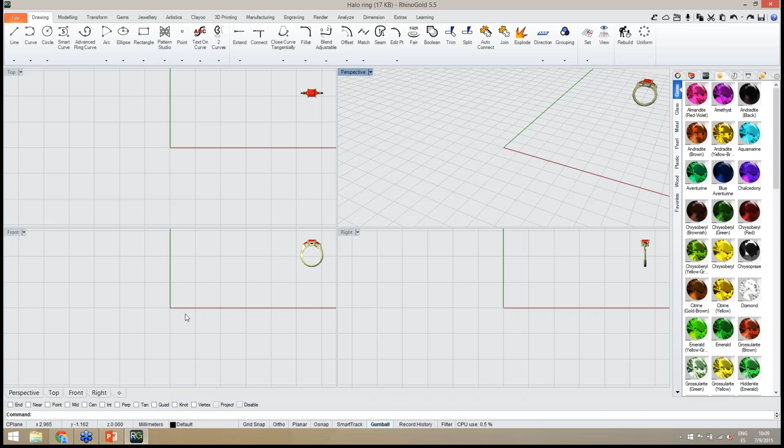So let's start with RhinoGold. I'm going to open the RhinoGold interface and let's start creating this model. As always, when we are creating a ring, the first step is always to define the ring size. In this case, under the jewelry tab with the gauge tool, we can do it easily. We just need to define in the side panel the ring size we want to use.

Also, we have several ring size charts, and after defining the ring size, we have a circle with the ring size we want to use. After this... May I? Yes, of course.

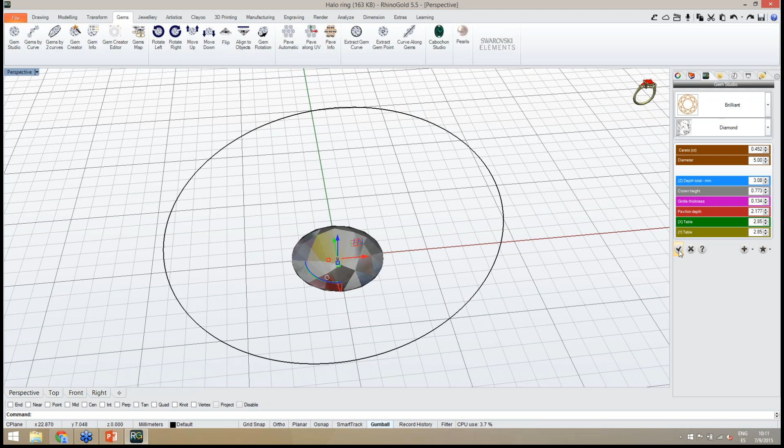So now I'm going to define another curve to define the bottom part of the ring, but actually it's probably better to define the main gem first. So the next step, I'm going to define a gem with the Gem Studio, and here let's use 5 millimeters diameter for this gem, and I will place the gem on the top of the ring.

Raymond, okay, if you want. Feel free to interrupt me, because I can move on with the process while you are translating. So any moment, feel free to interrupt.

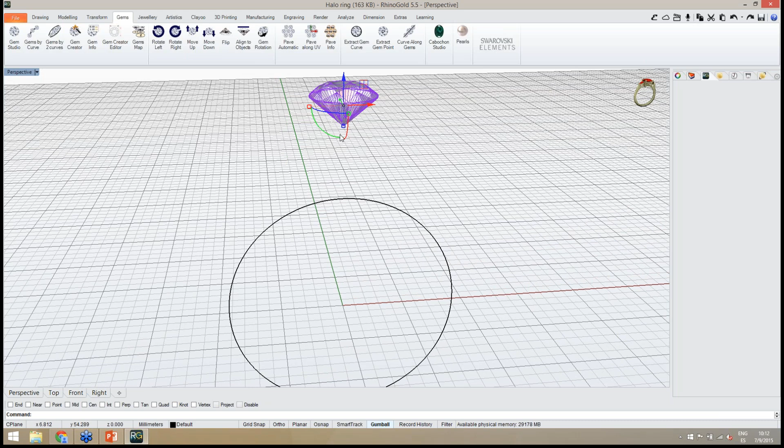Okay, so after the main gem, I define the position in the top of the ring. Of course, if I need to adjust the position later, I can do it easily, so there isn't any problem if it's not exactly the place we want to use the gem. And now I'm going to define the halo around the main gem.

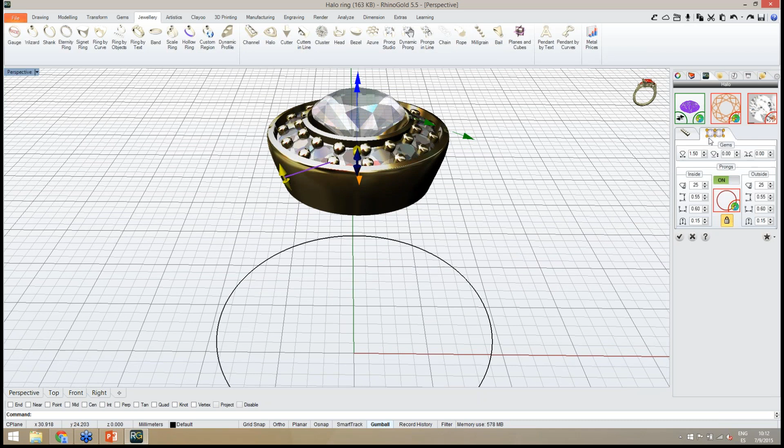So I just select the gem, and under the jewelry tab we have the halo tool ready to be customized. So now the idea is to use all the parameters from the halo tool in this side panel to define the halo. For instance, the profile. We can of course adjust the measure for the gems. In this case I'm going to use gems with 1.5 millimeters. Okay, and of course the same for the prongs.

We can adjust the position. As you can see in the side panel, easily we can adjust the diameter, all the measures, the position. So this is the idea.

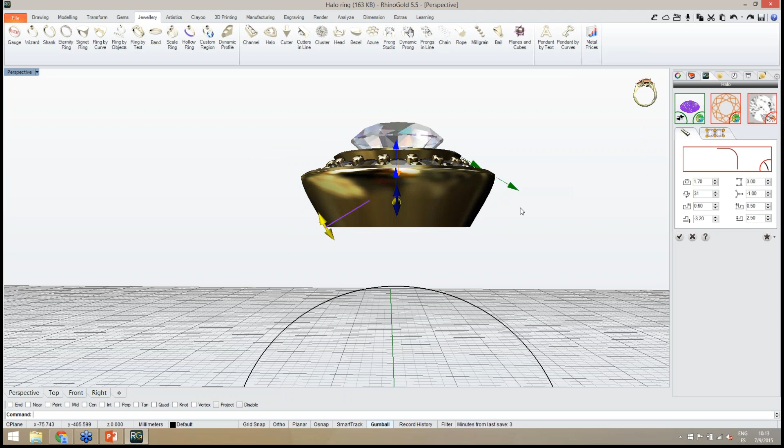So now I'm going to move on after the halo. Maybe I will just need to define less distance in the extrusion, maybe something like this, but we can easily define any position, and all the parameters are available in this side panel. So remember also we can at any moment edit the object and change anything we need.

So after the halo, I will then create the prongs for the main gem, but now I'm going to the front view to define all the other parameters for the ring. So now I'm going to define the curves in order to define the shank. To do it, yes, go ahead.

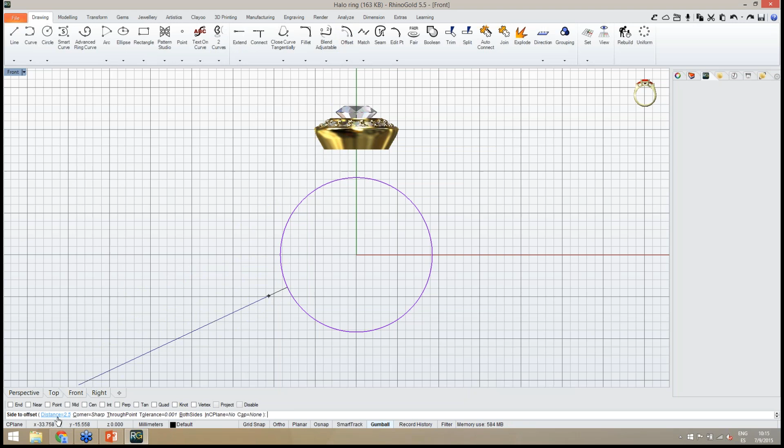Okay, so now the next step, I'm using the offset tool under the drawing tab to define, in this case, another curve in the outside direction with 2.5 millimeters distance. So we can easily define the distance to offset in the command line, and we just need now to click in the outside direction. So as you can see now, the result is another curve with 2.5 millimeters distance from the original one.

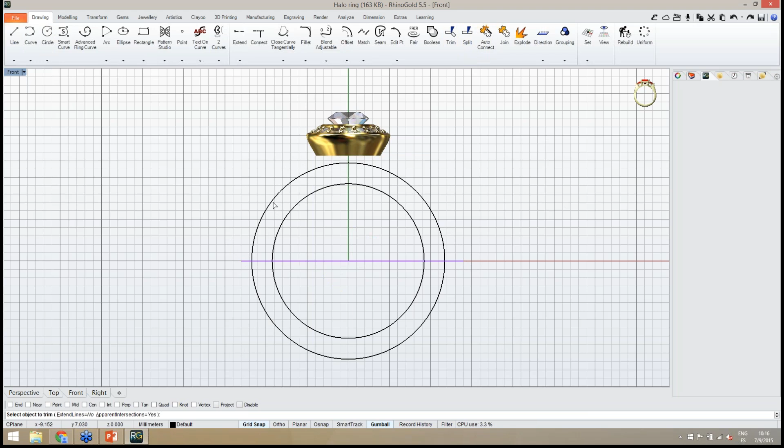So I will just use the bottom part of this curve, and now I'm going to create another curve, just a straight line, to define a cutting curve in order to remove the top part of the circle. So I define the line, and then I just need to use the trim tool and select the object to cut. In this case, the cutting object is the line, and then the object to trim will be this part. So as you can see, easily we can cut the top part of the circle, and of course then we can delete the line.

After, yes, if you want, Raymond, feel free. Yeah, just briefly. Okay, go ahead.

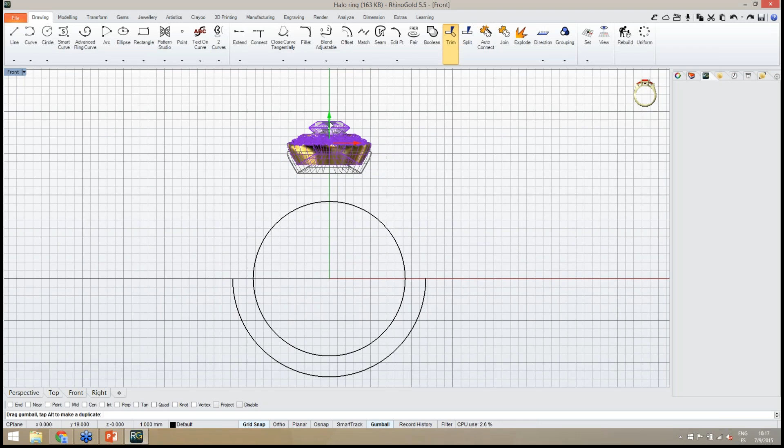So I move up the main gem 1 millimeter, in this case just a little bit more, and I will extend this curve in order to connect with the halo. So under the drawing tab we have the extend tools. I will use in this case the extend curve smooth. So I just select the curve I want to extend, and then I can easily define the position.

So in this case I'm going to remove the grid snap to define any point I want, and in this case I'm going to define the end of the curve in this point. Okay, so now we have the curve connected to the halo, and to make sure I'm going to have exactly the same curve on the other side, I'm going to cut this curve to divide the curve in two halves, and of course then I just need to create the symmetry.

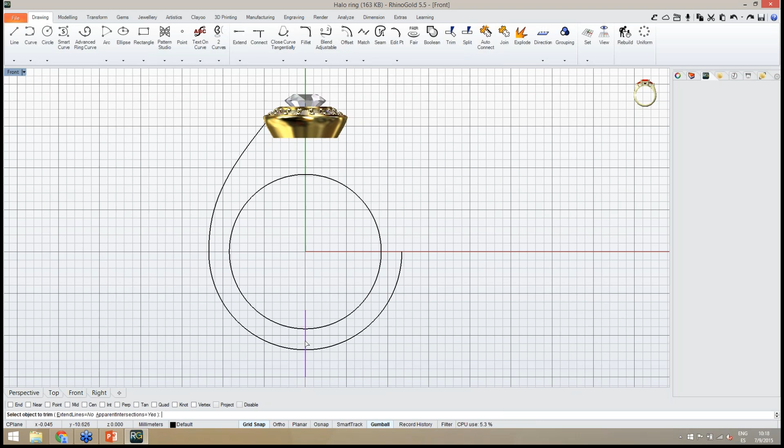So the same process, I define a line to cut this curve, and with the trim tool I define the objects to cut and the object to trim, in this case this part of the curve. So after this I just need to create the symmetry. So this is the result.

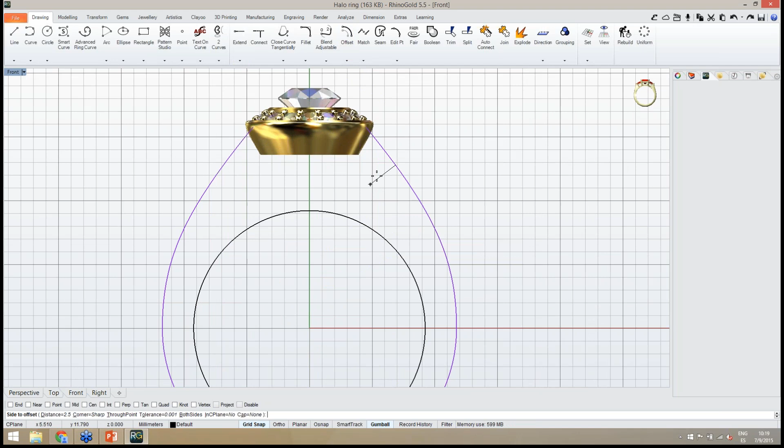I'm going to define the thickness in the inside direction. So to do it, again with the offset tool, I will keep the same distance, 2.5 millimeters, and I just need to pick a point in the inside direction. So this is the result, this curve, and I will do exactly the same in the circle again with the offset tool.

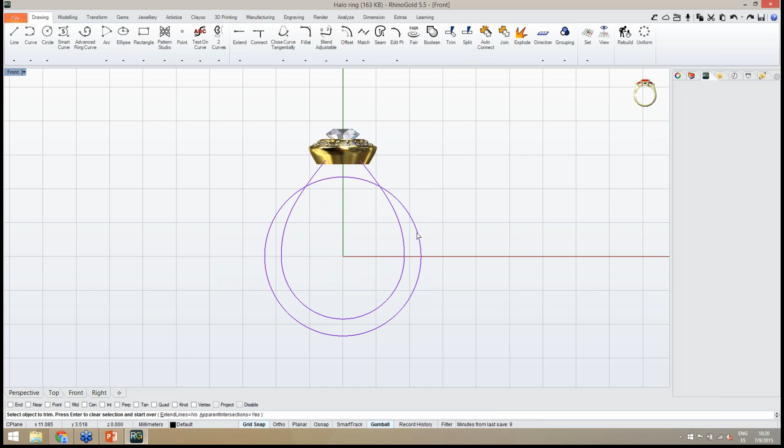And I define another curve in here. So I'm going to hide the outside curves just to show the results, the circle and the outside curve. And now I just need to cut the parts I don't want to use, in this case the bottom part of these two curves. So once again with the trim tool, I define the object to trim, this and this.

Okay, so at this point we have the curves defined. Let me show the other curves. So this is the result.

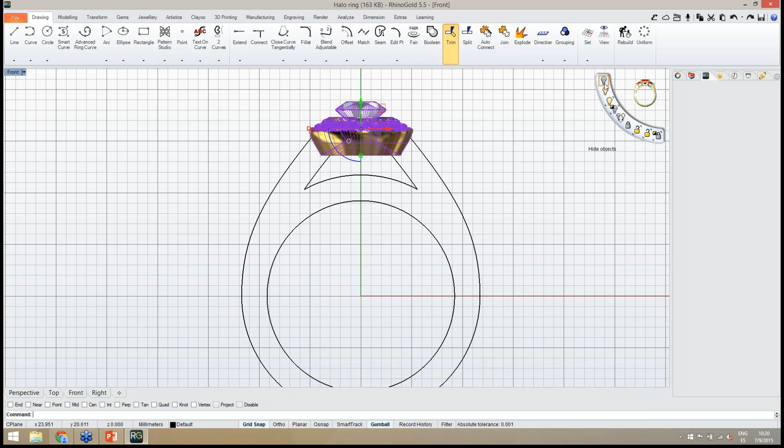Okay, so the next step, I'm going just to hide the main gem and the halo, just to, in this case, close this curve. So I just need to use the line tool, and I'm going to activate the endpoints in the OSNAP, just to make sure I'm creating a curve from this endpoint to the other endpoint. And I will repeat the step on the other side, and finally I'm going to use the auto connect tool to join all these curves in a single one. So now I have my closed curve.

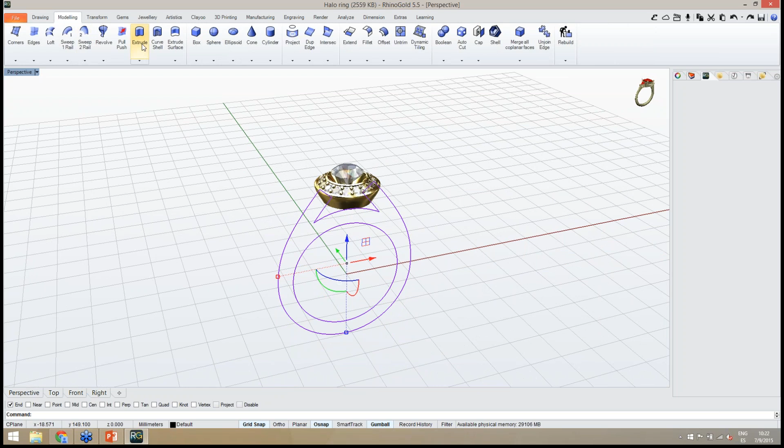So at this point I have the curve that defines the ring shank. So using these curves, I just need to extrude in order to define my solid. So under the modeling tab with the extrude tool, I just need to define the extrusion distance. In this case, I will use the option both sides, and probably in the right viewport, it's easier to define exactly the distance we want to use.

I'm going to change the display mode to shaded, and let's say I want 3 millimeters thickness. So what I'm going to define is 1.5 for both sides. So 1.5 millimeters, and I just click. In this case, I use the grid as reference. Remember, each square is a millimeter, so easily we can define the distance we want to apply.

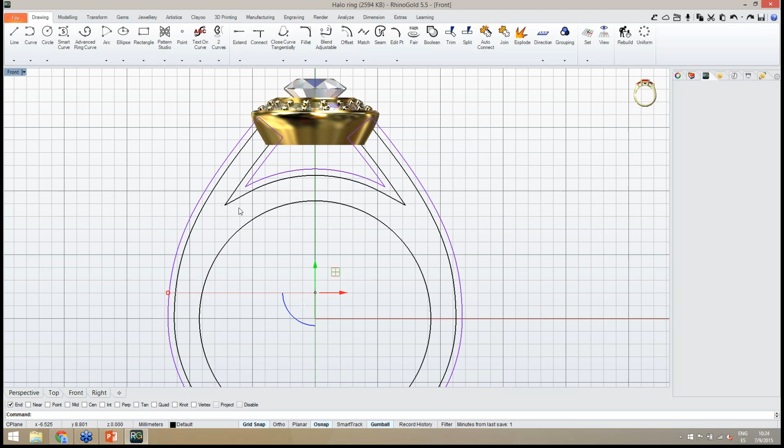And in this case, I'm going to define another distance. So in the command line, I need to define the new distance. In this case, I will define 0.5 millimeters. So this is the offset distance now. I just pick the point inside, and this is the result. Of course, I need to repeat this step for the circle inside, the circle that defines the ring size. So exactly the same, I select the circle, and with the offset tool define my curve.

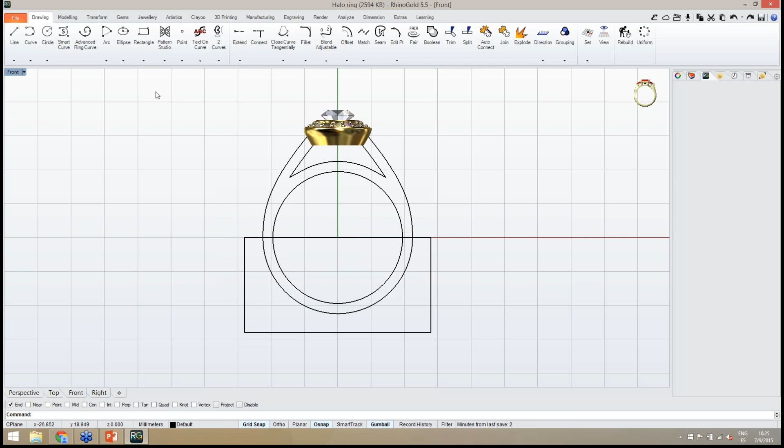Okay, thank you. So now the next step will be to cut the bottom part of this curve, because I just want to apply gems in the top part of the ring. So using a rectangle, I can define a cutting curve. The important thing is that I make sure I'm using the middle of the ring to start the rectangle, and then I can use again the trim tool to define the rectangle as cutting object.

In this case, I will define all the curves as cutting objects, and I press enter, and now I need to define the objects, in this case the curves, to trim. So I select all the curves I want to remove, and this is the result. Once again, I have the closed curve. I just need now to join all these curves in a single one. So with the auto connect tool, easily we can do it.

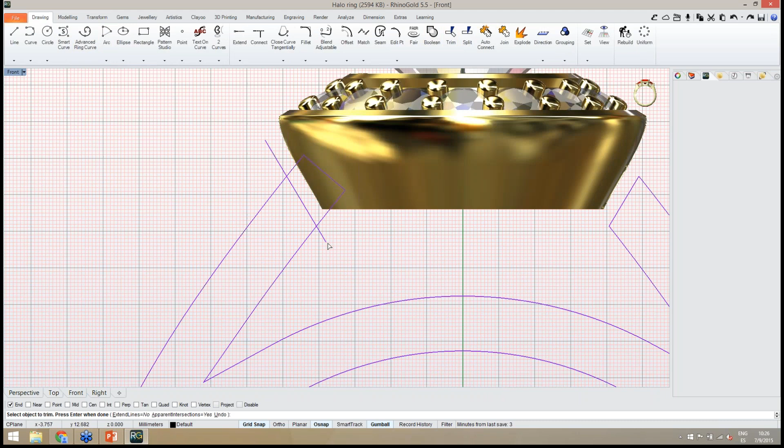Probably in here I will need to adjust the curve also. So maybe with a straight line, I can define the position where I'm going to start applying the gems. So I leave a small distance to the halo, and I just need to create a symmetry to the other side with this same curve. And once again, I select all the curves, and I repeat the trim tool to remove the parts I don't want to use. So I just click on the curves I want to remove, and this will be the area where I'm going to apply the gems.

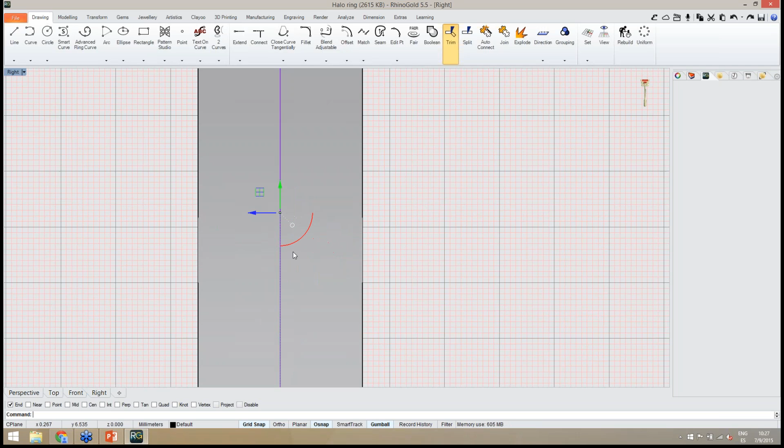Okay, so the next step, I'm going to show the shank again, and the next step is to create a recessed area using this curve. So to make sure the curve is in the correct position, I'm going to move the curve exactly the same distance I created the extrusion, in this case 1.5 millimeters, so exactly in this position. And now I'm going to define the recessed area to apply the gems.

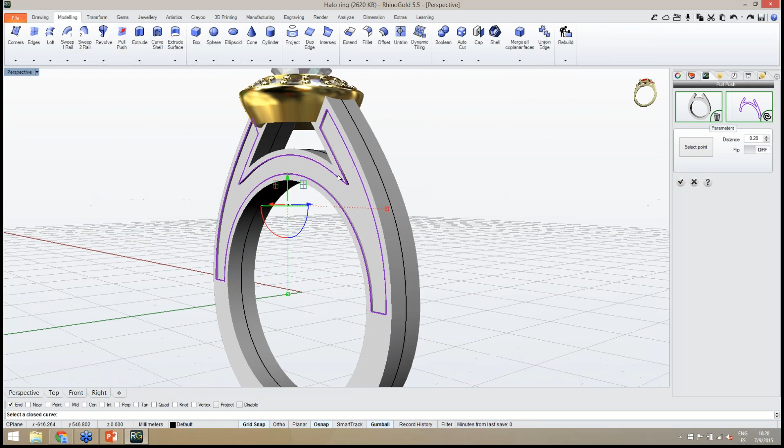To do it, under the modeling tab with the pull push tool, first I need to define the surface I want to create the recessed area. So I select the ring, and of course the curve I want to use. So as you can see now, easily we create the recessed area with a pull push.

Of course we can adjust the distance easily using, in this case, the distance selector from the side panel. So I'm going to repeat this step again. Pull push tool, first the surface and then the curve.

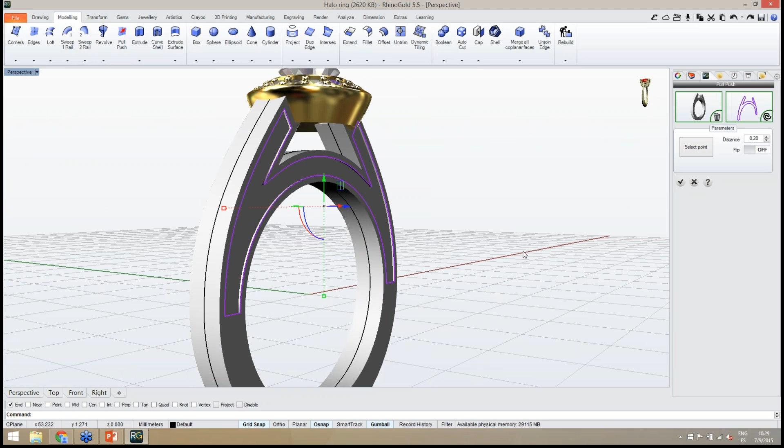Okay. So now exactly the same process. I create a symmetry, in this case, to create exactly the same curve in the other side. So I'm going to use again the pull push tool. The order is first the surface and then the curve, in this case this one. Okay, so once again I'm just defining this recessed area. So I press OK in the end to apply the changes.

I can hide these curves. I won't need them anymore. Of course I can delete them as well, but let me create a new layer, and I just right click and change object layer, and I can hide this layer. So these curves I won't need them anymore. And now I'm going to repeat this process, but with the other curves.

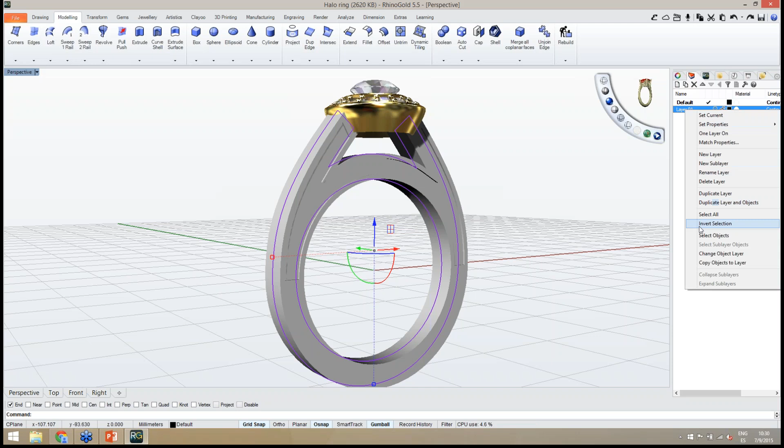So once again, I select the curves and I change the layer, and now I'm going to repeat this step, but in the side part of the ring. So I want to apply gems in this area. I'm going to create the curves to define the recessed area.

To create the curves, I'm going to use, in this case, the offset curve on surface tool. This tool allows me to select the curve on surface. I select the orientation I want, making sure the arrows are in the direction we want to create the curve. And finally, in the command line, we can easily define the distance. In this case, once again, 0.5 millimeters.

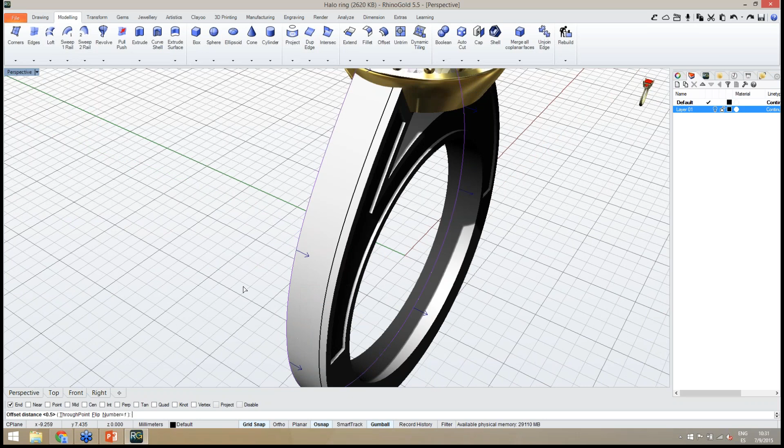And here we have the curve. And of course, the same process to the other side. Okay, go ahead.

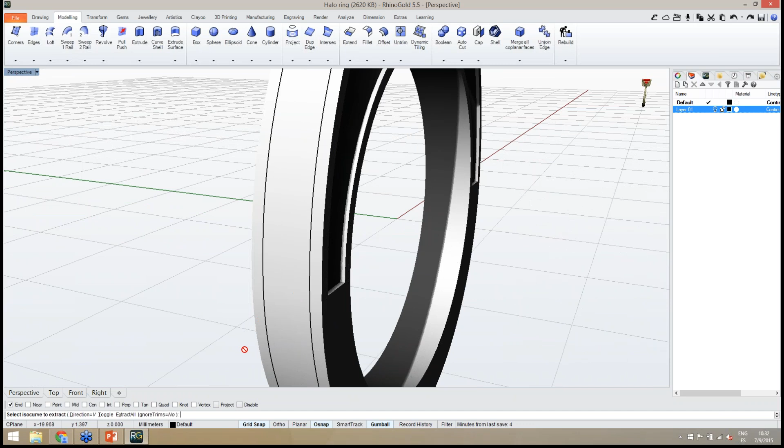Okay, thanks, Raymond. Now I just need to create the other curves, and it's probably easier with the extract isocurves. I just define the surface, and in this case it's not this direction, so I just need to change the direction in the command line. And in this case I will define another curve here, more or less in the same position as the front view, one curve here and the other here.

So these curves, it's the same process. I am defining the area where I want to apply some gems, so I can hide the ring just to make it easier to cut all these curves again with the trim tool. So modelling tab, trim, I select cutting objects, in this case all the curves, and for the objects to trim, I select the parts I want to remove. So exactly like this, and here we have the area where I want to apply the gems.

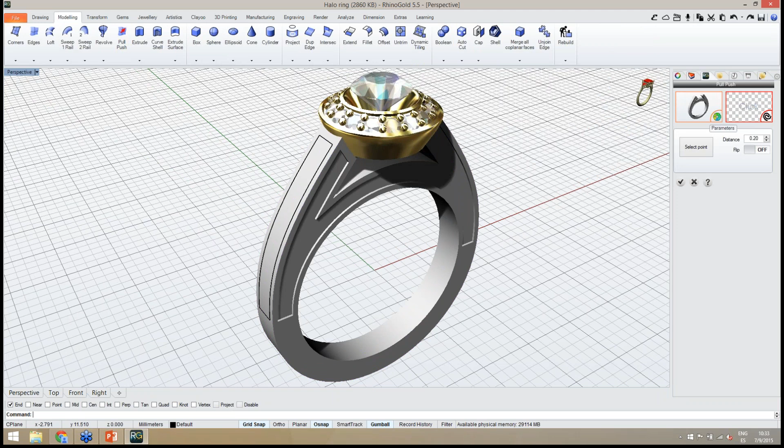Okay, so now let me show the ring again, and I'm going to repeat the pull push tool, in this case to create the recessed area in the side. So pull push, first the surface and then the curve. So this is the result, the recessed area. We can define the distance and click OK to apply the changes.

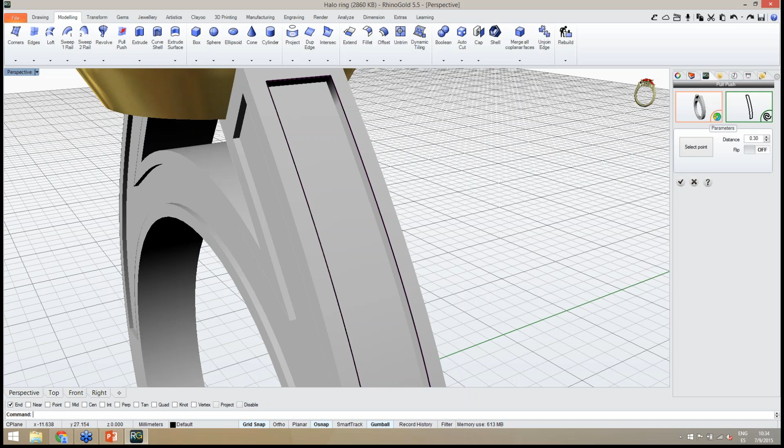To do the same in the other side, I just need to create exactly this same curve in the other side, so easily with the symmetry, in this case horizontal symmetry, I define this curve on this side, and once again back to the modeling tab with the pull push tool, I select the surface and I select the curve, and of course the distance, and click OK to apply the changes.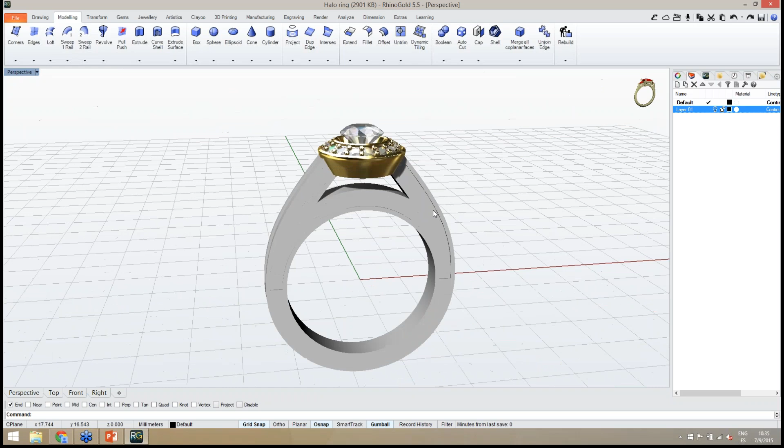So I will start probably with the side gems, and then I'm going to the front view and I will define these gems. So I will start with the side gems, and probably the easiest way we have is the gems by curve tool. This tool allows us to apply gems along a curve, but of course in this case I need to define the central curve here to apply the gems.

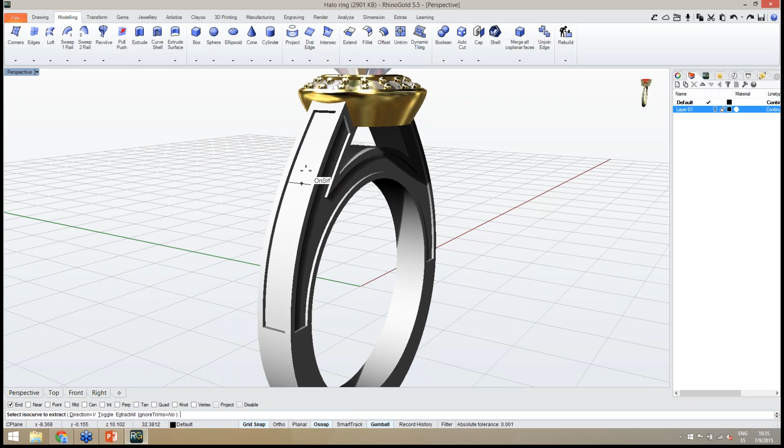So the easiest way is once again to create the curve with the extract ISO curves tool, and of course I need to select the surface. So in this case, let me remove the endpoint. In this case the surface is this one. I just change the direction, so I want this direction, and I want to make sure I'm using the midpoint. So I'm going to activate the midpoint option in the OSNAP, and I just click on the mid, and here we have the curve.

So of course now the gems by curve tool allow me to define the curve. So of course the next step will be just to define the gems position, the number of gems, and of course the gem size. So as you can see in the side panel, I can define in this case gems with 1.7 millimeters, and with this point allow me to define the start position for the gems.

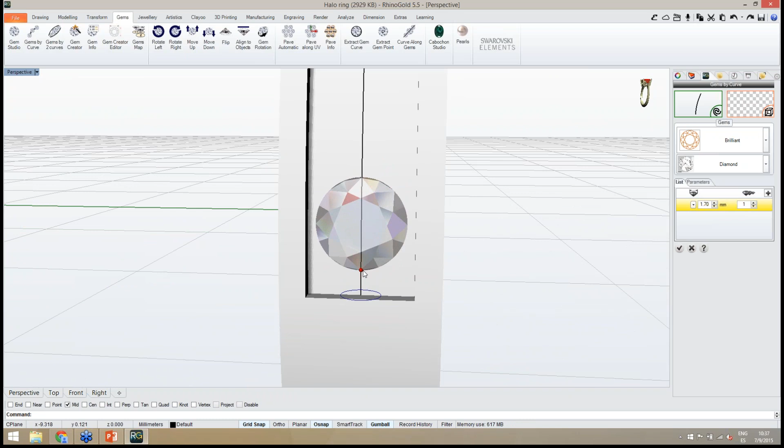I want to leave some space to apply the prongs, so I will start in this position, and then in the second tab I will justify the gems in order to divide the number of gems along the curve. So back to the list of gems, I will define the number of gems. In this case, I'm going to use 8 gems.

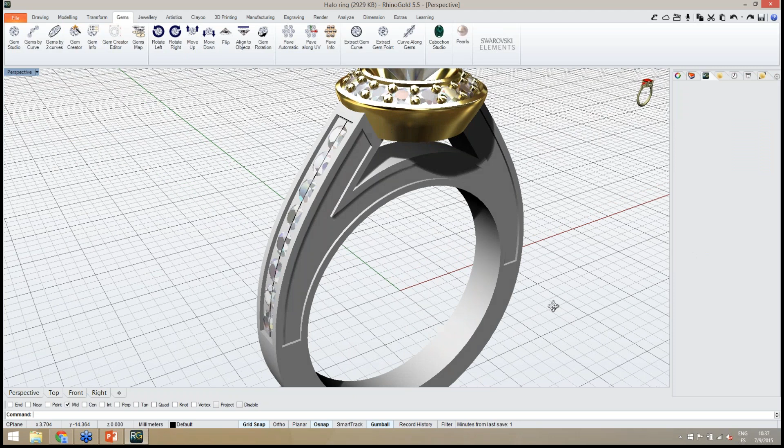So I will repeat this step and I will adjust the start position of the gems. And as you can see, the gems are defined. I just need to click OK. And as you can see, the gems were successfully created.

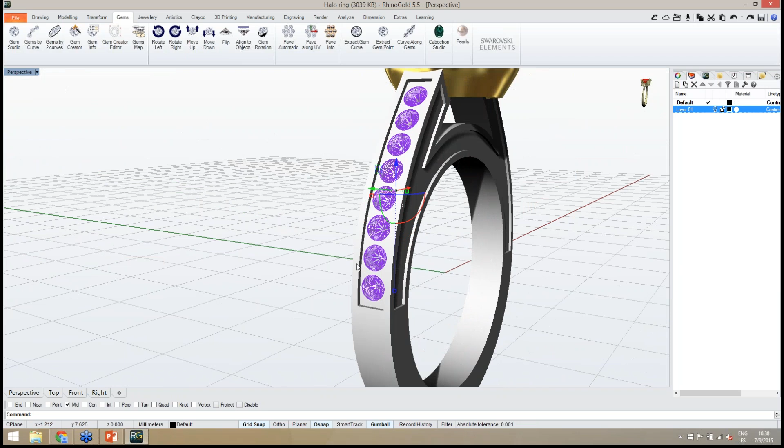So now I will need to create the prongs to apply on these gems. To do it, under the Jewellery tab with the Prongs in Line tool, it will be the easiest way to define the prongs. So prongs in line, and I select the gems, and of course all the measures, so diameter, cap, everything can be defined in the side panel, and now we just need to drag this central point to define the prongs.

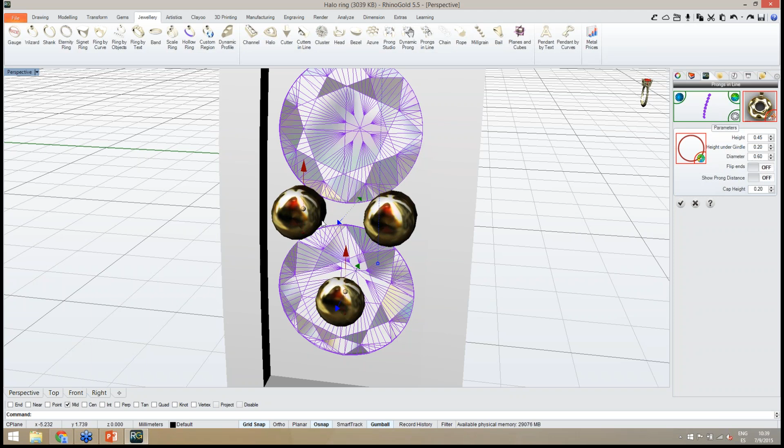Remember, if we press shift, we can apply the changes to all the prongs. So when we define the position for these 2 prongs, if I press shift, it will apply the changes to all the prongs in this case. So we will just need to define the end prongs and the start prongs. So once again, I define the end prong and the start prong.

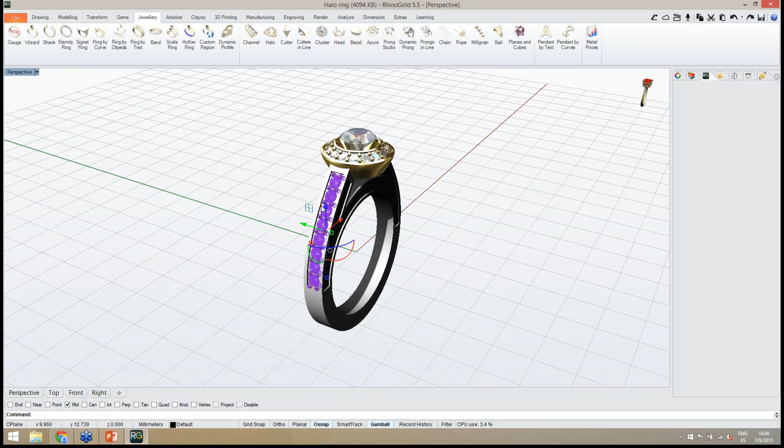Okay, so the next step is to create the symmetry in order to apply the gems and the prongs to the other side. So I just select the gems and the prongs, and under the transform tab with the symmetry horizontal, as you can see, automatically we define the gems and the prongs to the other side.

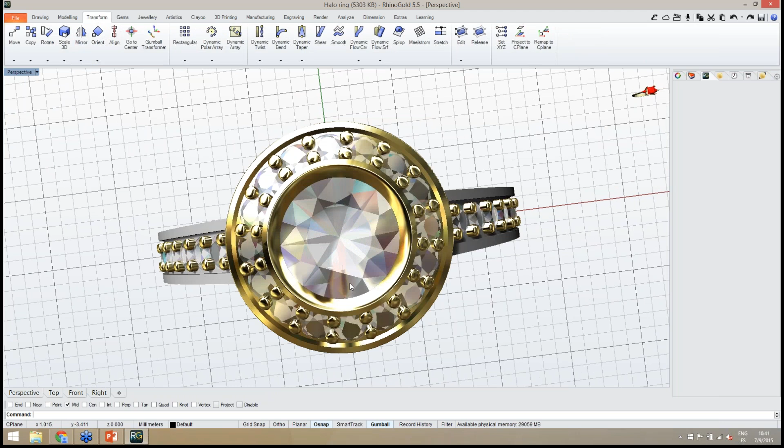Okay, so now I can also define the prongs for the main gem, and to do it, I can use, in this case, the Prong Studio tool under the Jewellery tab, and I just need to select, in this case, the main gem, not the shank, only the gem. And of course, now I will adjust all the parameters in the side panel, so the diameter, the cap, all the measures I want to use on these prongs.

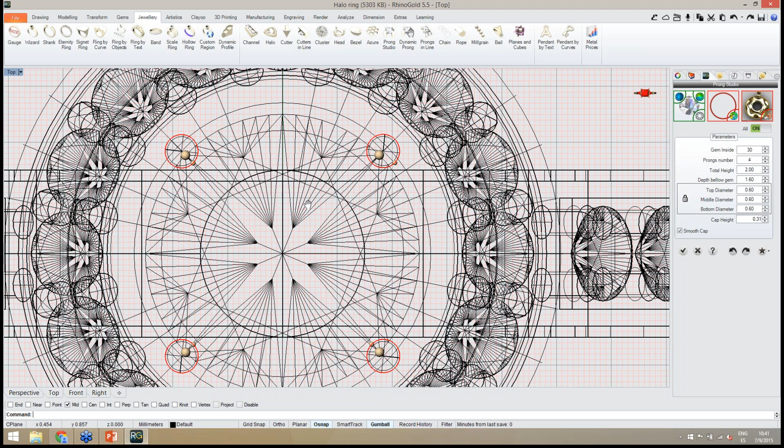And in the top view it will be easier to define the position. So remember, once again, if we press shift when we drag one prong, it will drag all the others around the gem. So in this case, I want to define the new position in here. So as you can see, now I have the prongs defined. If I need a little bit more thickness, I can define it easily in the side panel, in this case 0.7 millimeters. And as you can see, the prongs are ready.

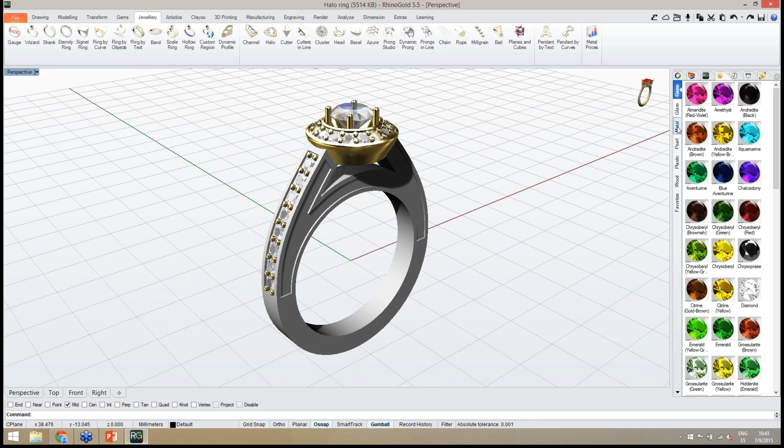So just remember, at any moment we can define the material for the shank. In the RhinoGold materials tab in the side panel, we can choose metal, and here easily we can drag the material to the object, as you can see. And of course, now I will define the gems, in this case in the front view, to apply on the rings.

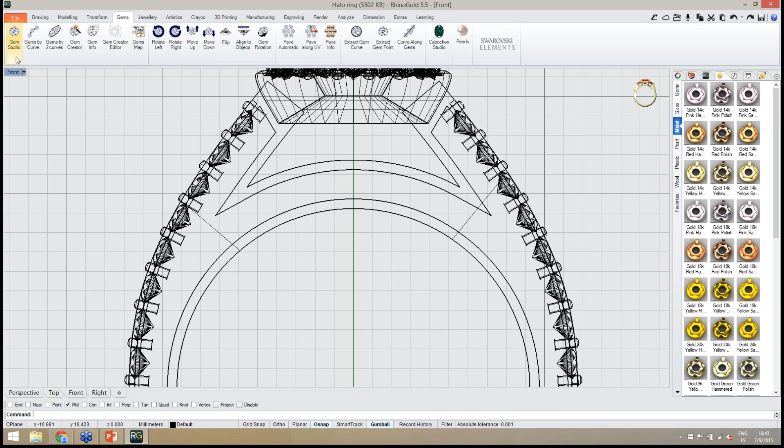So I'm going to the front view, maybe with the wireframe it will be easier, and this is the area I want to apply the gems. And in this case I'm going to the gems tab, and probably with the Gem Studio tool, we have several possibilities to create these gems. I believe the Gem Studio can be the easiest way. So I just define Gem Studio tool and the gem size.

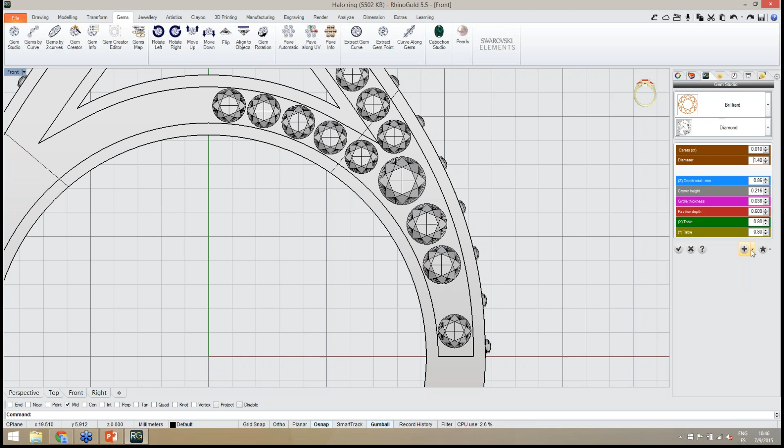Now I will reduce the size a little bit more. Let's try 1.7 millimeters to create another gem here, and once again I adjust the size, I choose the point where I want to create the gem. Finally, let me change to 1.4 and define another gem here.

Then I will adjust the position, so it doesn't matter if they are touching right now, I will adjust the position later, and I just click OK to add the gems to the document.

Now I just want to avoid the gems touching each other. I just need to adjust the distance a little bit here. I drag the gem, click and drag to the new position, and do the same here. I just make sure there's some space to create the prongs, and as you can see, the position of these gems is defined.

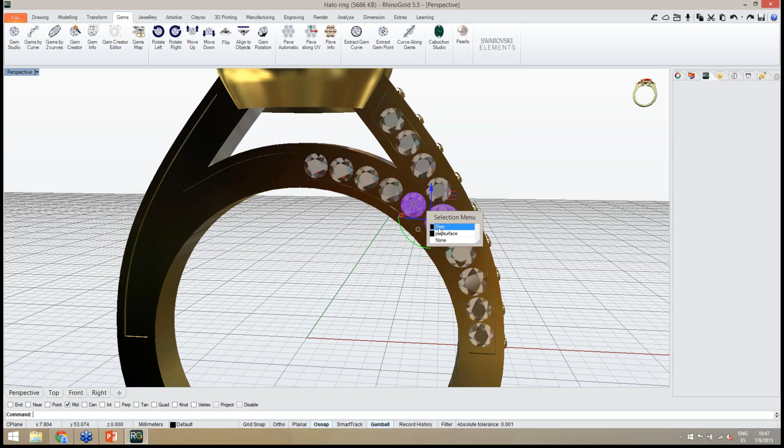Now I will apply, probably first, the symmetry. Let me select all the gems - maybe in the front view it's easier. Select all the gems, remember to press Shift for multiple selection, and let's use the symmetry horizontal tool to apply the gems to the other side of the ring.

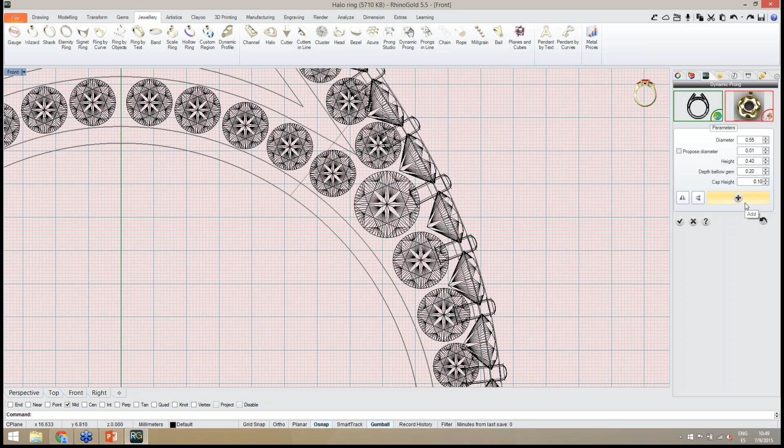Remember, we can use the symmetry, so we have mirror horizontal, and when I add prongs on one side it adds prongs on the other side. Maybe we have also the possibility to create the symmetry at the end, so maybe I just apply half of the ring because I want to create also in the center, and then create the symmetry.

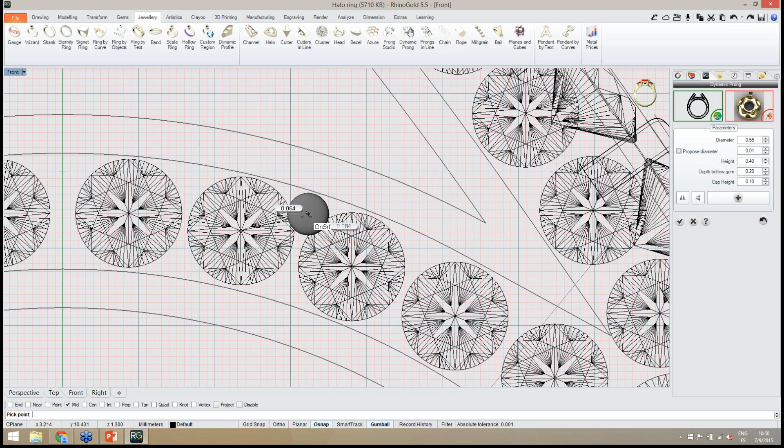So I just need to apply the prongs in this half of the ring, applying prongs between gems - 2 prongs between gems, like this. Let's go back to the perspective view and see the results. So just applying the prongs between gems.

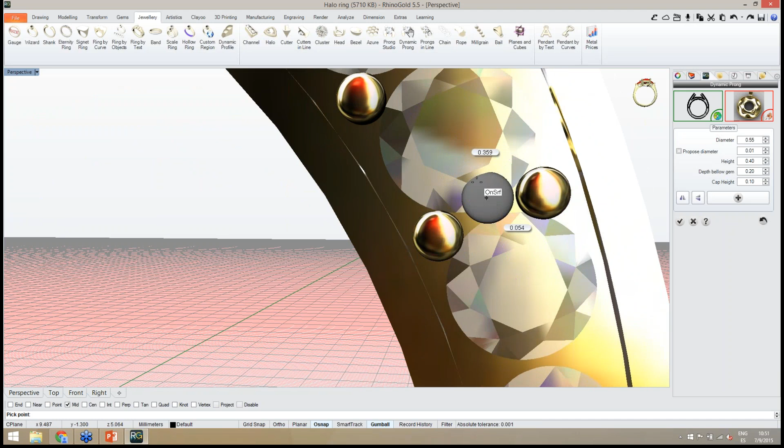So in this process, I just click on the position I need to apply a prong. I just pick the point. In this case, I'm going to use 2 prongs for each gem - something like this seems perfect. Remember, we can change measures and edit prongs after applying, and as you can see easily, we can define the prongs position.

Okay, so let me remove - okay, I forgot this last prong here, and done.

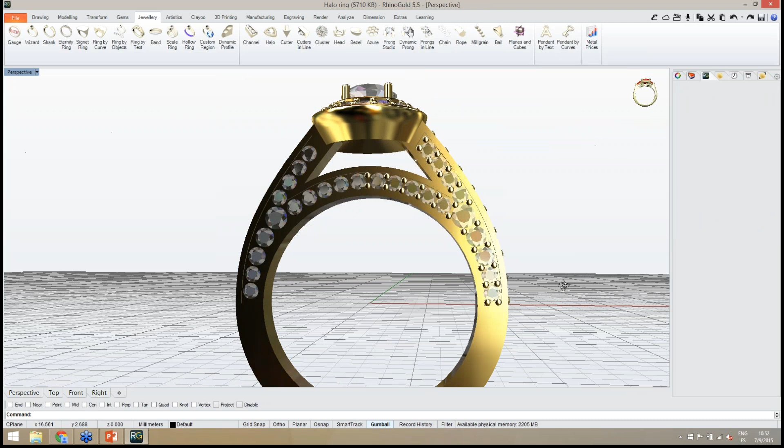So in the end, I just click OK to add the prongs to the document, and I'm going to create the symmetry. But at this moment, the prongs are grouped, all the prongs are created, and I don't want to create a symmetry with these two prongs, just all the others. So first, I'm going to remove these prongs from this group.

So in the Drawing tab, grouping submenu, we can find the remove from group tool. This tool allows me to select the objects I want to remove from the group, so these two prongs are removed from the group. I just select the other prongs, and I will create the symmetry.

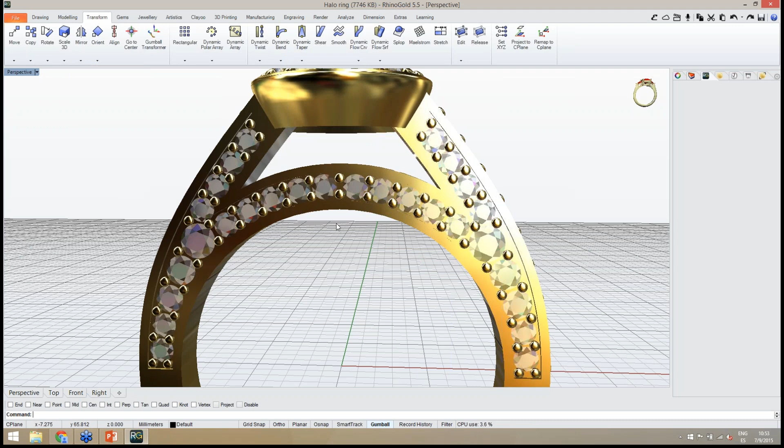In the Transform tab, I'm going to define once again horizontal symmetry to define the prongs on the other side. Now I will select all the prongs, group them again, and create the symmetry, in this case using the prongs and the gems. I forgot to group all the gems, so maybe it's easier for the selection only because of that.

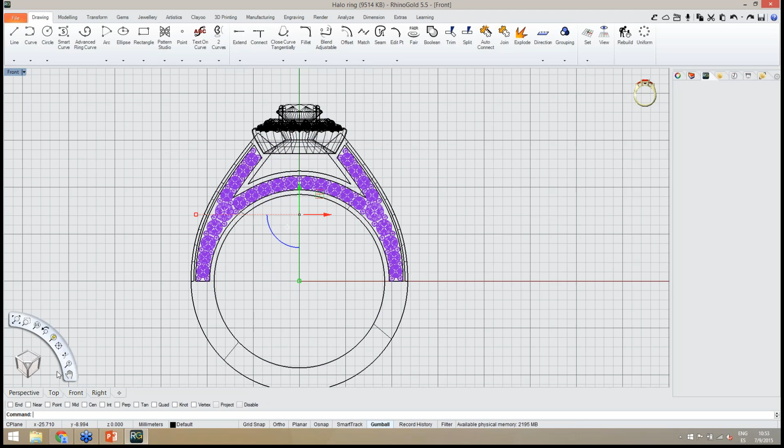So maybe if I hide the gems and prongs from the side, in the front view, I can easily select all the gems and prongs. Remember, Control to remove from the selection and Shift to add to the selection. So I select gems and prongs - maybe first I will group only the gems. Group tool again, and now with the gems and prongs selected, I will define the symmetry.

In this case, I will choose vertical symmetry, and here we go.

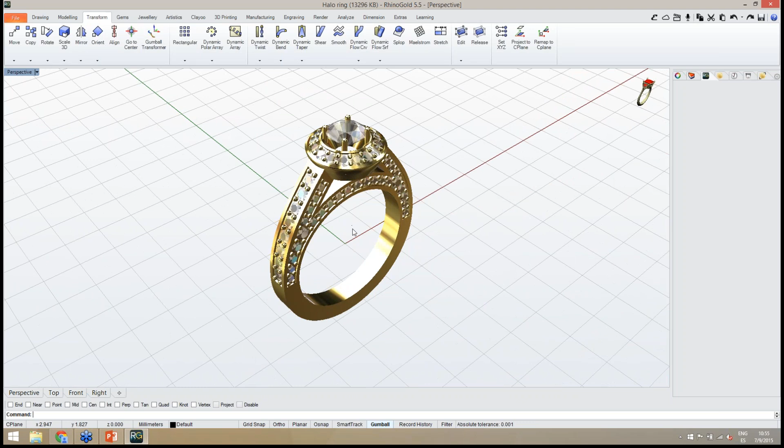Of course, we need to create the holes under the gems to define the stone seat. Easily we can do it with the Cutter Studio tool. To do it, I'm going to use under the Jewellery tab.

In this case, the Cutter tool. So the cutter, to define the cutters, I need to select the gems where I want to apply the cutter. So I select first this group of gems, and in here, these are the gems where I want to apply the prongs, in this case the cutters, and maybe change to wireframe.

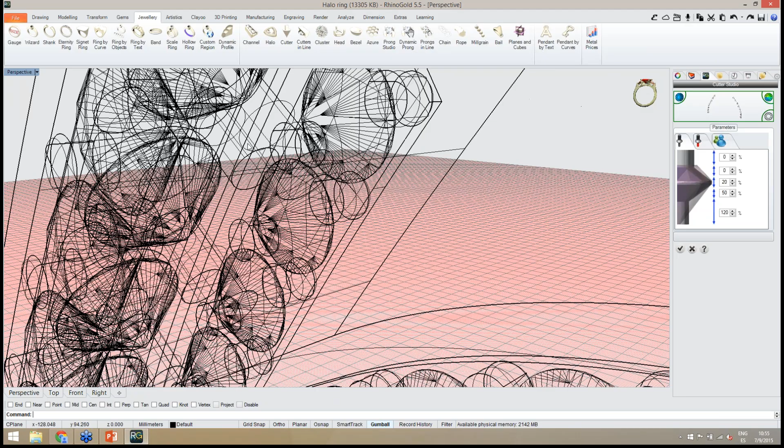I know it's a little bit confusing, lots of curves, but just to make sure I don't create my cutter too big, so maybe the bottom part of the cutter, instead of 120%, I'm going to define just, let's try 30%. I press enter, and as you can see now, the cutter is only until here.

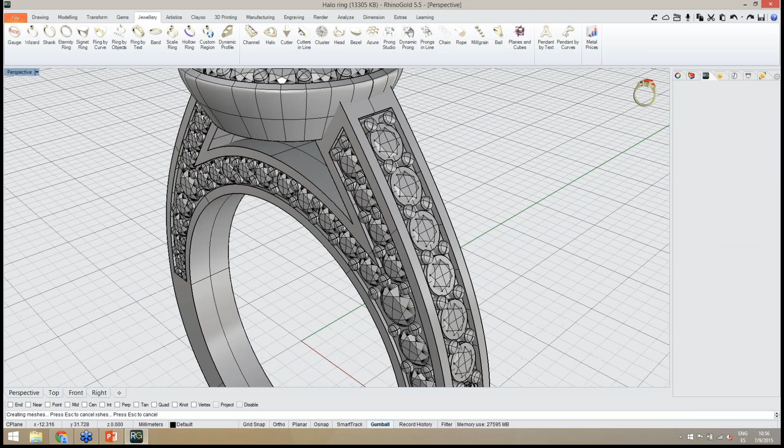So what I can do now is let me go back to shaded, to make sure the cutters are with the measures I want to use. I just click OK to apply these cutters in the document, and I will repeat this process with the other gems.

So once again, I select the gems on this side, and I'm going to use the cutter tool again to define the cutters. So let me change again to wireframe, and to make sure the cutters are not too big, once again I will use 30% in the bottom of the cutter, and let's see the results.

As you can see now, the cutter is in here. So back to the shaded display mode, everything looks good, cutters on both sides. I just click OK to apply the changes.

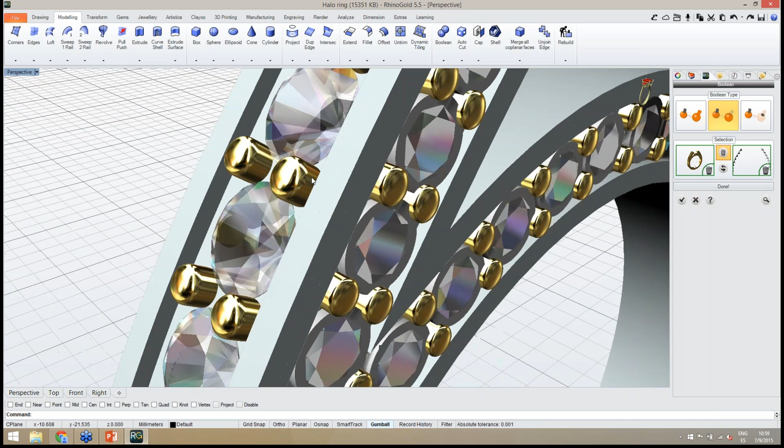As you can see, the Boolean was successfully created. Let me just hide the gems in order to check the results. As you can see, now we have the stone seat defined. And now I will repeat this process for the other gems.

Once again, Boolean, I define Boolean difference. Object, it's the ring shank, and I want to remove, in this case, objects to remove, the cutters. So after this, we just click on preview to calculate the results.

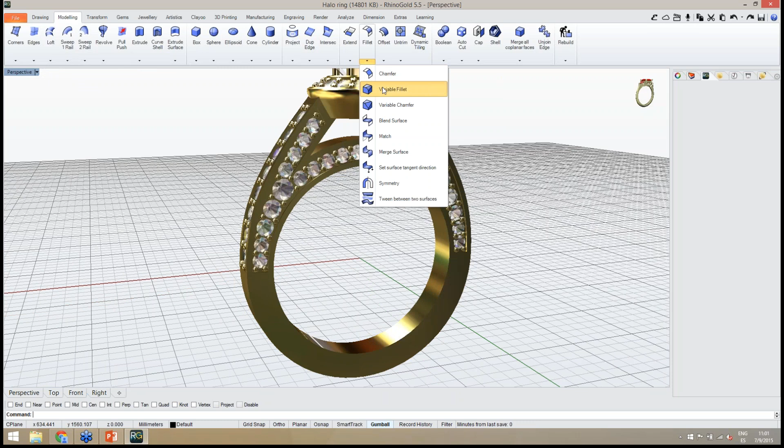Maybe we could fillet here a little bit, the inside part, with let's try the variable fillet tool. We can define the fillet angle in the command line. Let's try, for instance, 0.2 millimeters, just to create in here a fillet angle, and just to break the sharp edges from the shank.

I can repeat this process on the outside curves, and this is the idea.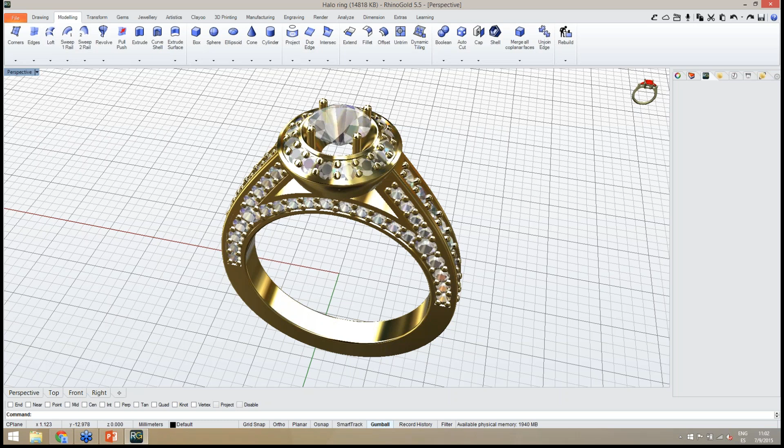So probably now there is no other detail we need to define on the ring. The model is ready. We can from here create the photorealistic image. We can of course export the model to STL file format in order to be printed.

Maybe I can create a photorealistic image just to show all the process on this ring, to generate a photorealistic image. And to do it, I'm going to use, in this case under the render tab, the Render Studio tool. So I can define the gems.

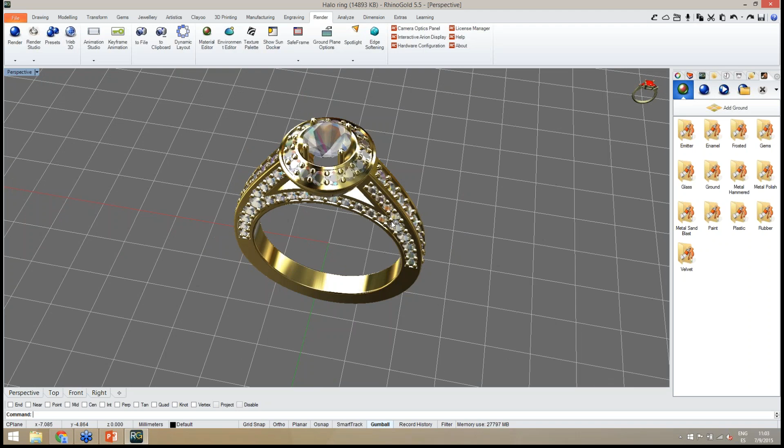First, I need to define the materials. I'm going to start with the gems. So in the side panel, when we click on Render Studio, we have all the folders with the materials from Render Studio. I can open the gems folder and define, let's say for instance, the main gem I want to use a ruby.

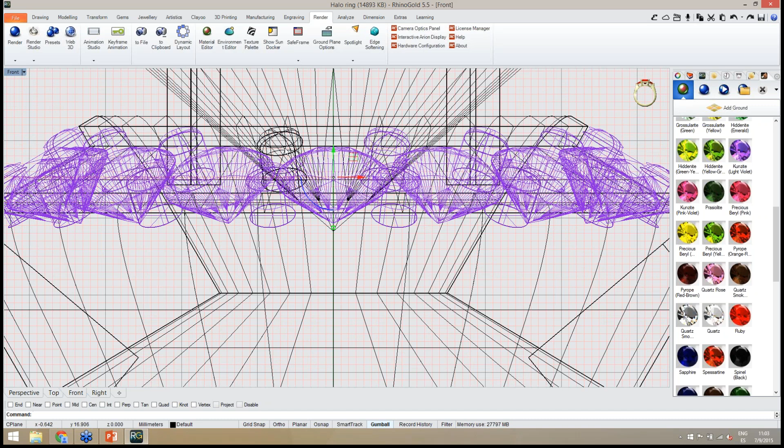The gems in the halo, I can define. Let me select all the gems easily like this, just drag a window, maybe. Of course, I don't want to select the prongs, so let me remove the prongs from the selection. I'm just clicking on Control to remove the prongs from the selection.

And now I will apply also the material for these gems.

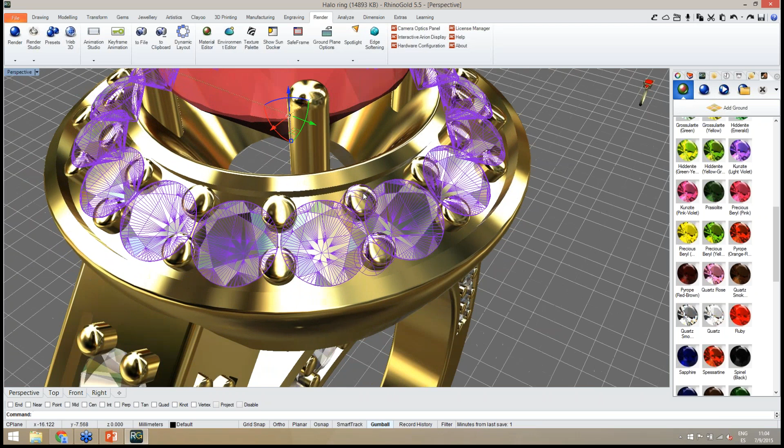And now all the gems are selected. I can group them just to be easier for the selection. And I can define, let's try, well, any material, maybe this one, just to be a little bit different.

And of course, the same in the side gems. So in these small gems, I can use again this one, the Andradite gem material, and of course all the other part, in this case the metal, I can select easily with the RhinoGold material selector tab.

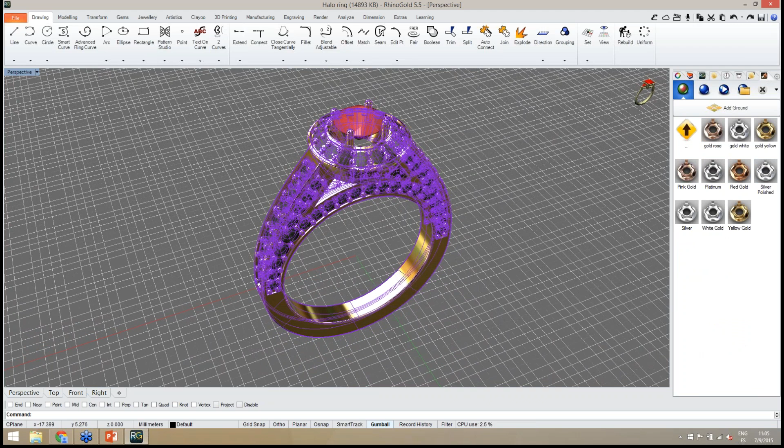I just double click on the material, in this case the RhinoGold material, and of course back to the Render Studio tab. I need to change to, let's go to the metal polish folder, and in here I will use, let's try white gold.

And now all the materials from the render were successfully applied. I just need now to calculate the render. So in the second tab I can find the render tab, and in here I need to set the resolution for the model, and of course the position I want to create the render.

Let's try this position. And of course, in this case, I choose any resolution.

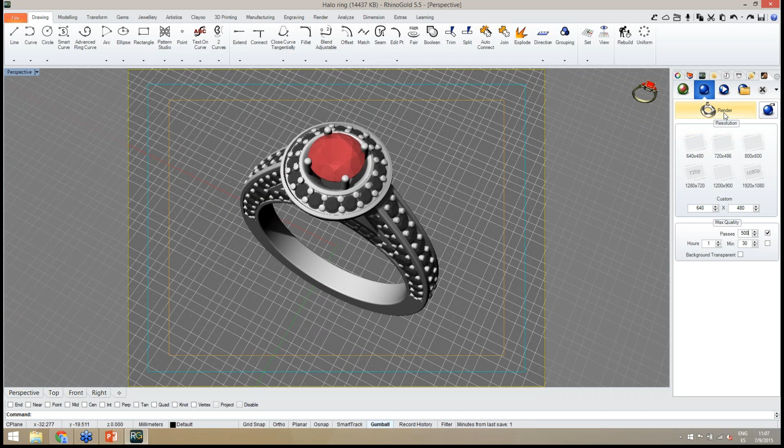We have the possibility to define the number of passes, which if I don't activate, it will start rendering, and then we need to stop the render manually. So if I don't check the passes or the time, I will need to stop render. If not, I can define, for instance, 500 passes, activating here, and it will stop automatically when it calculates 500 passes. So let's try.

Just click on render, and here we go. Start calculating the render.

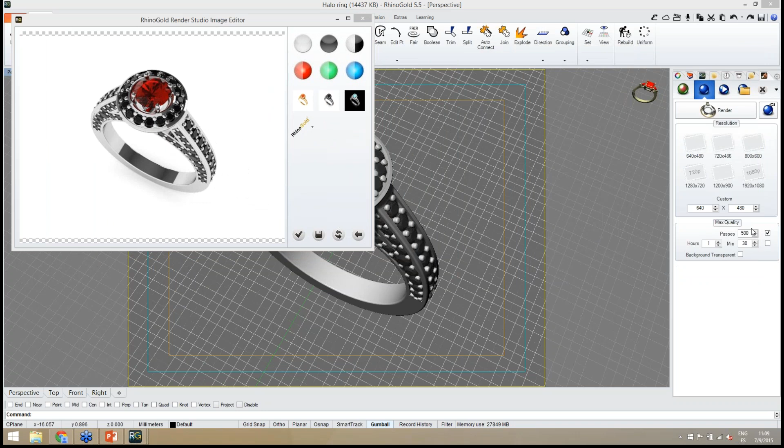We hope that everybody could learn a little bit today about RhinoGold. Of course, we are recording this webinar, so within the next hours we will publish it online, so everybody can rewatch it as many times as needed. And from our side, this is pretty much what we wanted to show you, how to design a Halo ring.